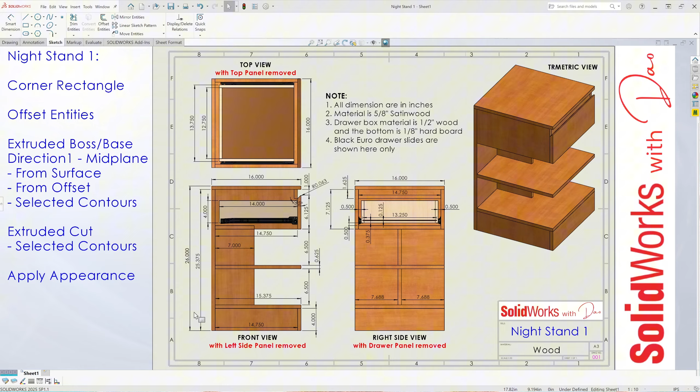Okay, looking at the front view with the left side panel removed. The overall height of the nightstand is 26 inches high, 16 inches deep, and at the right side view, 16 inches wide. Now going to the front view again. There's a back panel at 25 3/8 of an inch tall by 16 inches wide. The top panel here is 16 inches by 16 inches wide.

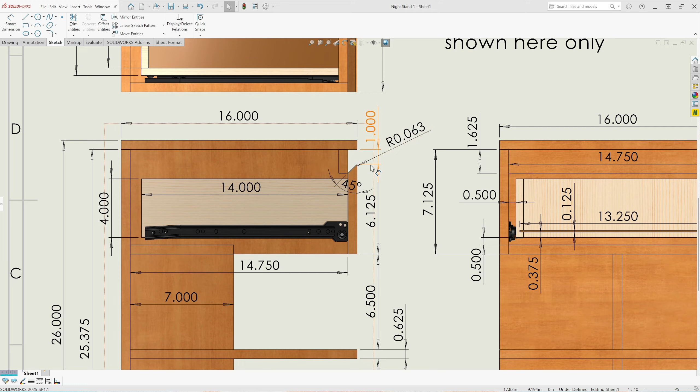Then there's this small panel here in front of the drawer front, and that's 1 5/8 of an inch tall by 14 3/4 of an inch long. The drawer front itself is 6 1/8 of an inch high by 16 inches, shown at the top view here, 16 inches wide. And at the top there's a miter of 45 degrees, and at the top tip point there's a radius of 1/16 of an inch to soften the edge, make it less sharp and pointy.

At the front view here, there's an upper panel. That's 7 inches wide by 14 3/4 of an inch long. Then there's two vertical center panels, 7 inches wide by 6.5 inches tall. They're positioned right in the center of the nightstand, shown in the right side view, right in the middle.

The middle panel here is 15 3/8 by 16 inches wide, and the bottom panel is the same. Then there's a front panel at 4 inches high by 16 inches wide. Then there's a left and a right bottom panel at 14 3/4 of an inch long by 4 inches high.

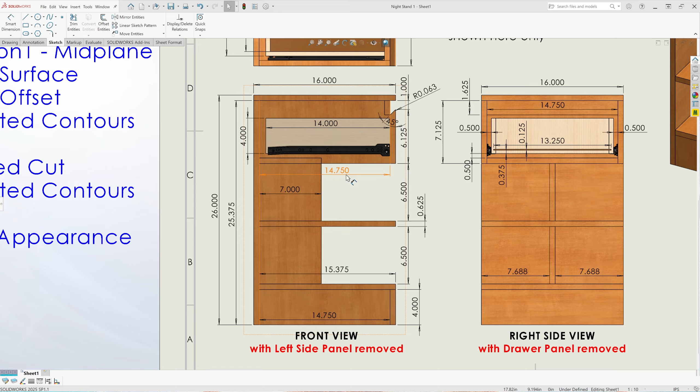Going back up where it says front view with left side panel removed, this left side panel is right here. There's one on the left and one on the right, and they are 7 1/8 of an inch tall by 14 3/4 of an inch long. It's shown here in a trimetric view. It covers the drawer box on the side.

Sticking to the front view, the length of the drawer box is 14 inches by 4 inches high, and it's 13 3/4 of an inch wide, shown at the top view with the top panel removed. And this 12 3/4 is to show the length of the back panel of the drawer box, at the back here.

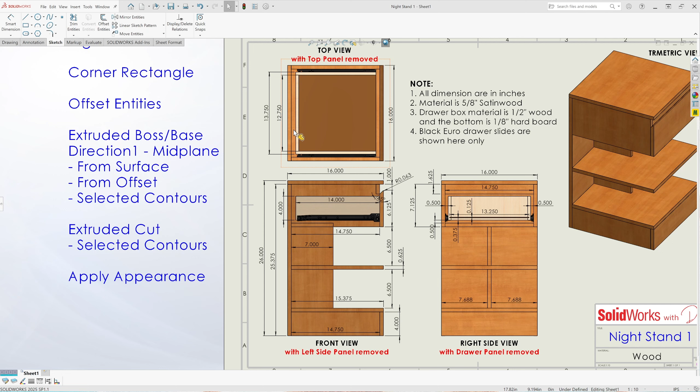Now moving to the right side view with the drawer front panel removed. Looking at the drawer box now, it's sitting inside from the left panel and inside from the right panel, 1/2 inch on both sides, and that's the spacing for the Euro slides.

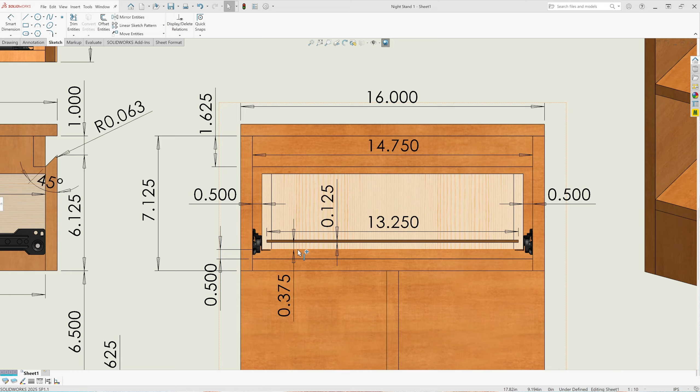The bottom of the drawer box is sitting up from the top of the upper panel 1/2 inch. And the drawer bottom is 1/8 of an inch hardboard, and it's sitting up from the bottom of the bottom panel of the drawer box, 3/8 of an inch up.

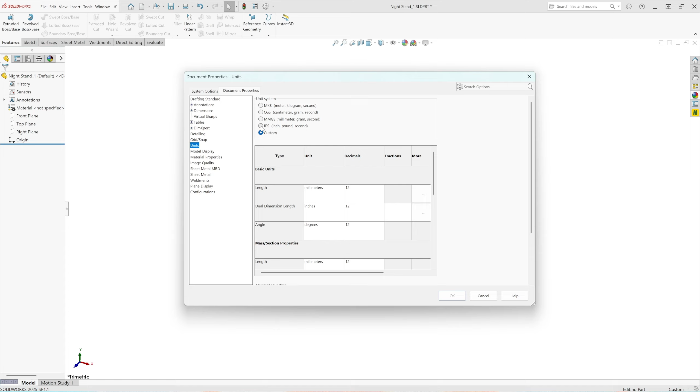So let's get started and design Nightstand 1. File, New, Part. Save drawing as Nightstand 1. Going to apply scene here, plain white. System Options at the top. Document properties tab, units, IPS drawing in inches, 3 decimal places for dimensioning.

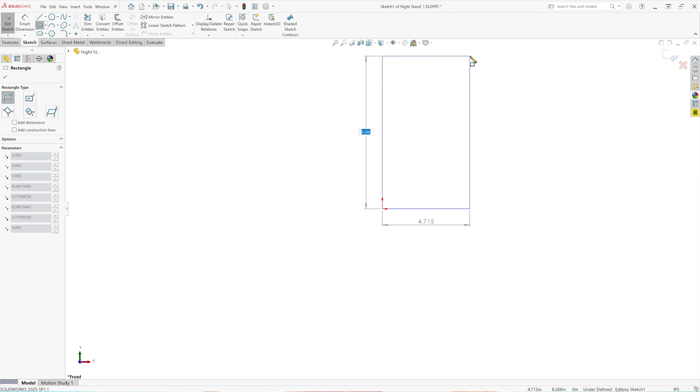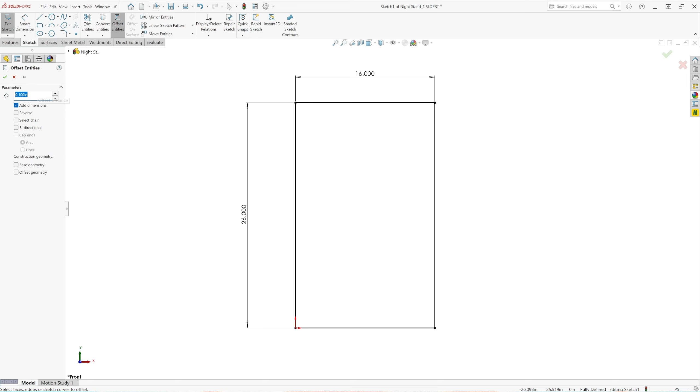Starting from the front plane. Sketch front plane, a corner rectangle from the origin at the bottom left. Smart dimension, 26 inches. 16 inches. Cancel smart dimension. We're going to do offsetting now. Offset entities, distance 4 inches, add dimensions checked. Up, or reverse direction. 4 inches.

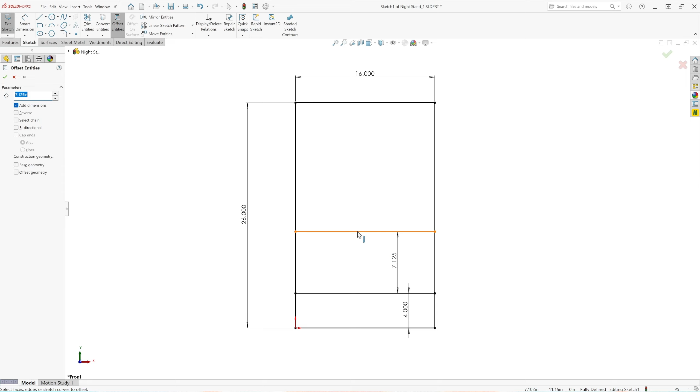Offset 7.125, 7 and 1/8 of an inch, this line up. Hit enter to repeat the command. Same thing, up. Now I'm going to offset 5/8 of an inch, so 0.625. I'm going to offset this line down.

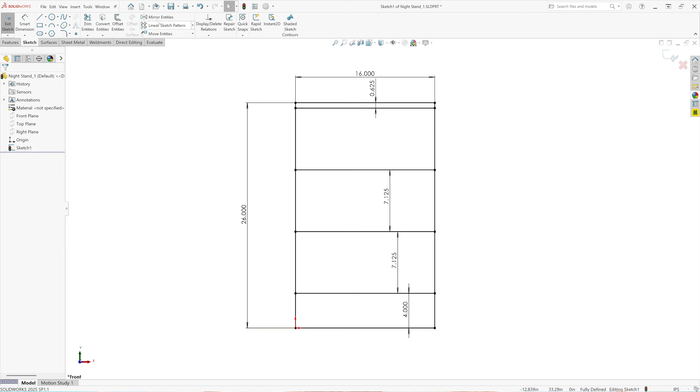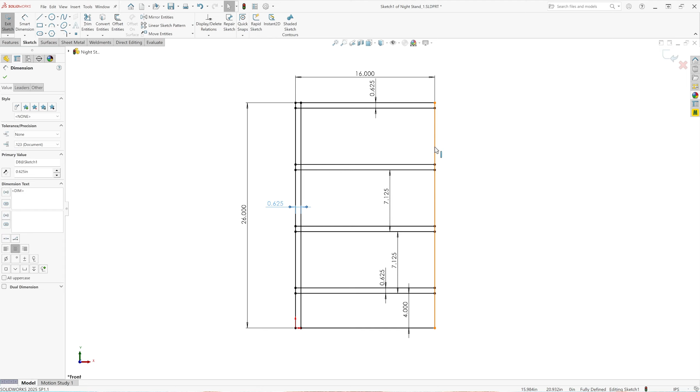Offset again. Select this bottom line, hold shift, select this line, and reverse direction up, shown with these yellow lines, 5/8 of an inch. Again, offset 5/8 of an inch, add dimension, this left line inwards, offset again, this right side line inwards. Now I'm going to offset again at 7 inches, this line, towards the right, inwards.

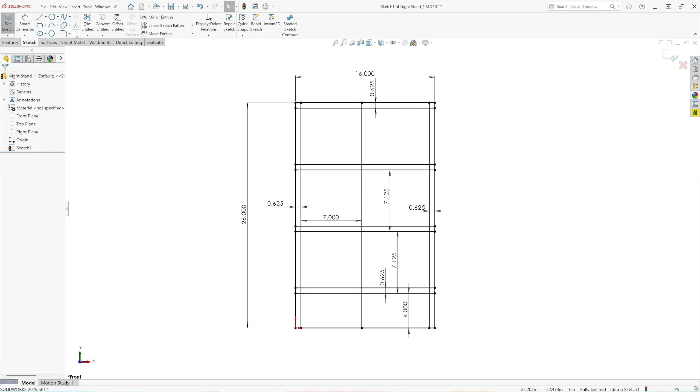Now we're going to do a lot of trimming. Trim, power trim, trim this line, this line, this line, so I have my top panel. Going to the left side here, trim this line, those two lines, this line, these two lines. Now I got my back panel. I'm going to trim this line, this line, this line. This middle line here. I don't need this. So I got my middle panel.

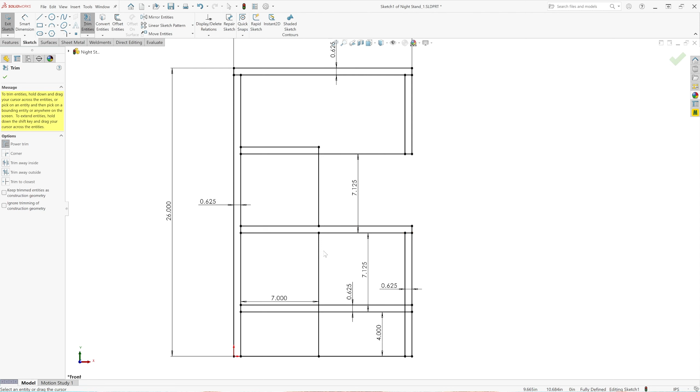All right. I don't need these two lines. I don't need this line. And I don't need this line.

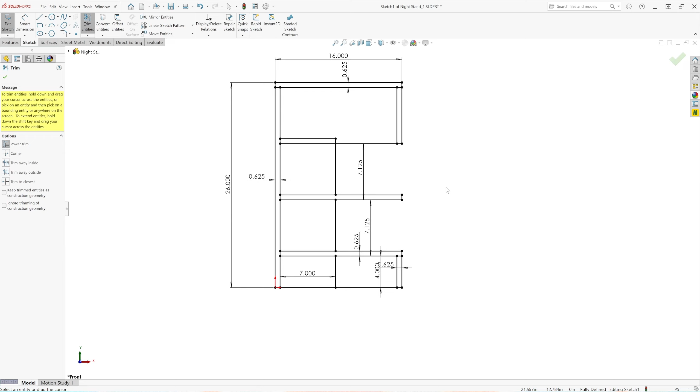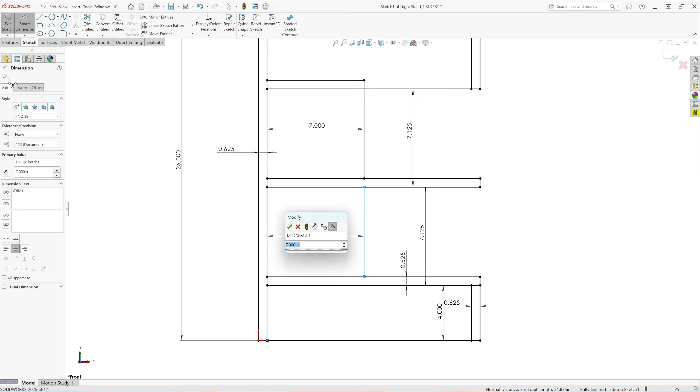And I don't need this line. Okay, so go smart dimension. That's 7 inches, put it back. Okay. And this is the same thing, 7 inches, just to make our drawing fully defined. Again. Okay.

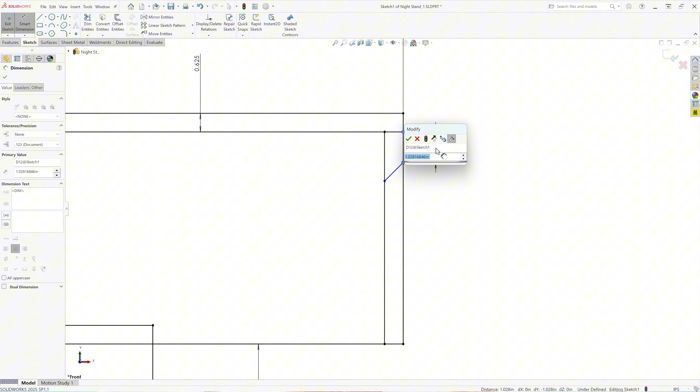Looks good. Now I'm going to cancel smart dimension, draw a diagonal line from this inside line towards the outer line. Okay. I'm going to give it a smart dimension from that point right there to that point, 1 inch. Okay. And angular dimension from that diagonal line to that vertical line, 45 degrees. Okay.

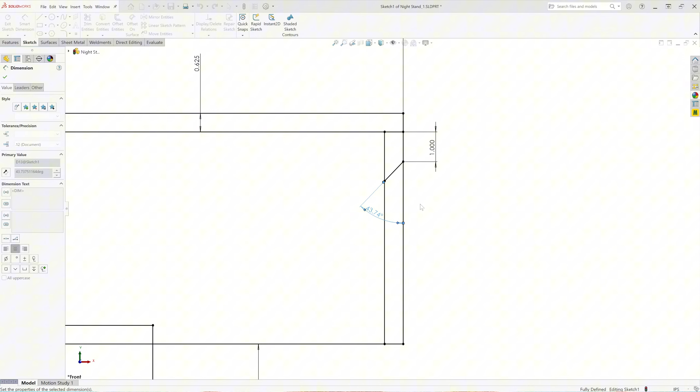Okay, so I'm gonna trim this line now. Okay, so I got my drawer front right here of the drawer box, and I'm gonna add a fillet, 0.0625, 1/16 of an inch. Okay, right there, that point, to make it less pointy. That's where the fingers go to pull out the drawer front box. Okay.

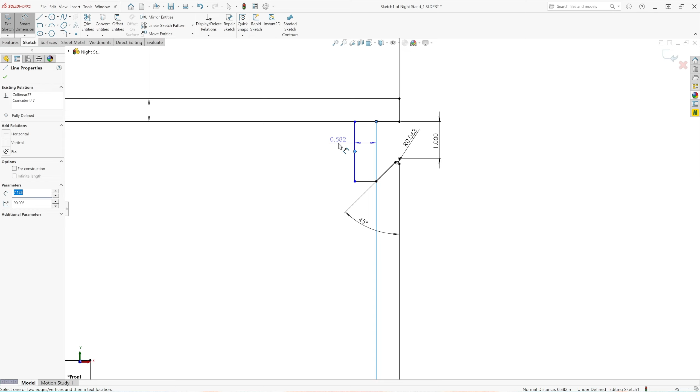All right. I'm going to draw a line like this, over and up. Okay. 2 lines. Smart dimension. The thickness of this is 5/8, 0.625. Okay, cancel smart dimension. Now we're going to be doing extruding. Okay.

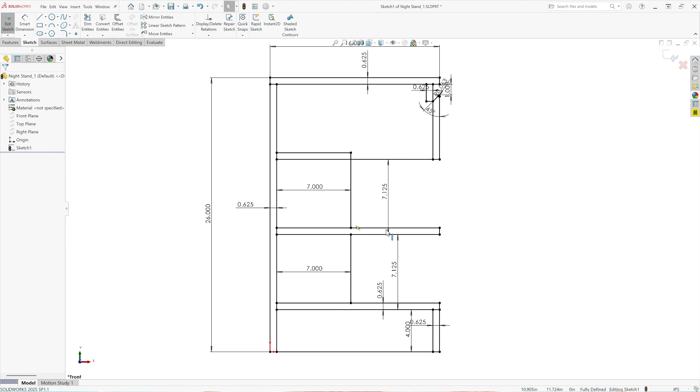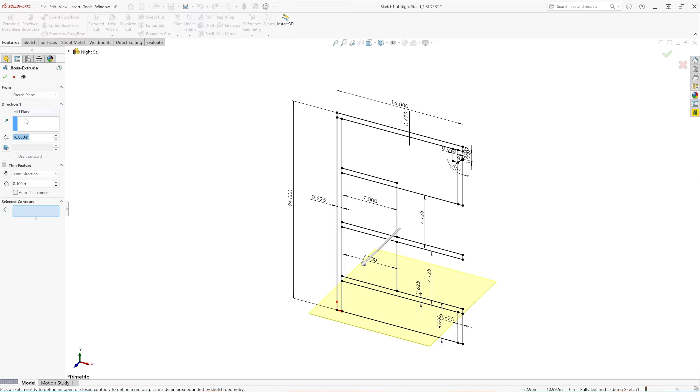All right. So I'm going to go to features, extruded boss base. Okay. The width of the nightstand is 16 inches. Okay. Selected contours, direction 1. I want it from the midplane. Midplane, 16 inches. So I'm going to look at it from the front view to choose these contours. It's easier, okay? So I'm going to select the top panel, the middle one, and the bottom one, right? And I don't want thin features, so unselect thin features, 16 inches, okay.

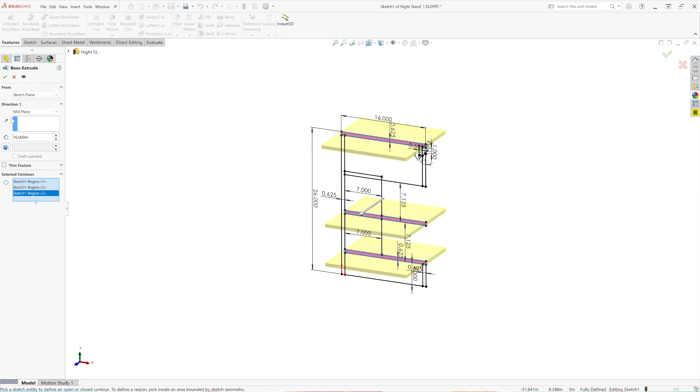So I got 3 bodies. I don't want real view graphics right now. Okay, go back to Boss Extrude 1 here on the left, the arrow, sketch 1. Continue to extrude boss base. Unselect merge result, 16 inches. Okay, from the midplane, direction 1 from the midplane, and again I'm going to the front view. I'm going to select the back panel, the drawer front, and the bottom front panel. Okay, and unselect thin features. We want them as solid bodies. Okay, from the midplane, 16 inches. Okay, so I got 6 solid bodies.

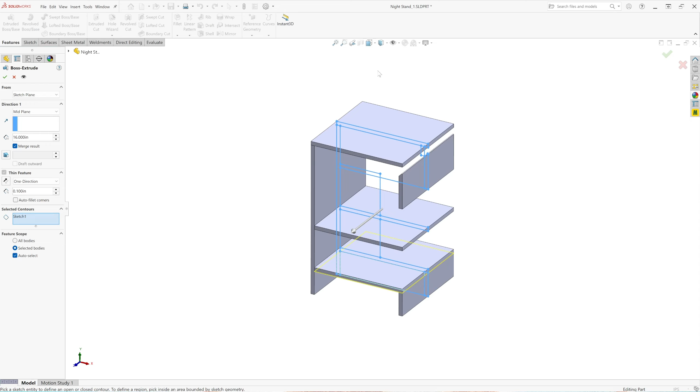Again, sketch 1, extruded boss base, view orientation right here. I like to work from the front plane. It's easier to select the contours. So I'm going to unselect merge result. Now I'm going to change 16 inches to 14.750, 14 3/4 of an inch. Okay, and from the midplane. Okay, and I'm going to select this contour, this rectangle, and this one. Okay, and unselect thin features. Okay.

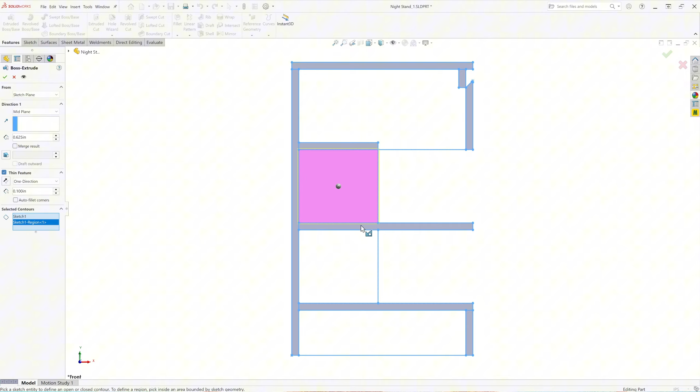Okay, so 8 panels. Now we got sketch 1 again, select it, extruded boss base. Okay, unselect merge result. I'm going to change the distance to 0.625, the thickness of the wood. Okay, 5/8 of an inch from the midplane. And again, view orientation, front plane, I'm going to select this panel and this one, the shelf support, okay? The middle panels, okay? Unselect thin features, from the midplane, okay? 5/8, all right. Okay, so we got 10 bodies.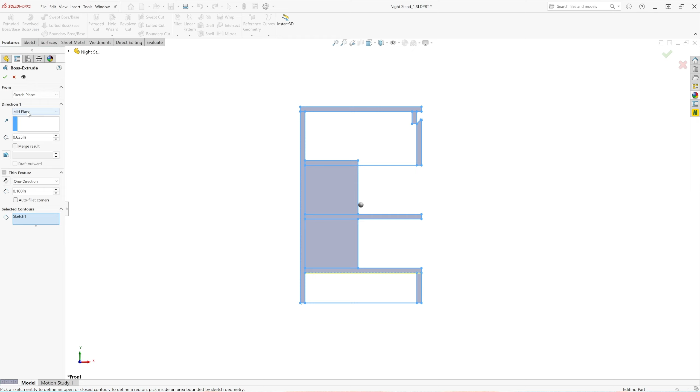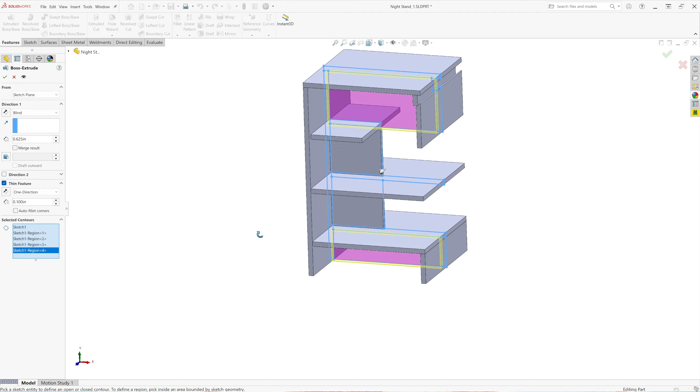So I'm going to go back to sketch 1 again and continue to extrude boss base from the front plane to look at it easier to choose the contours. Unselect merge result, keep the distance at 5/8 for the panel. We're not going to be doing midplane anymore. We're going to go to blind, okay? And I'm going to select this contour. I'm going to zoom in here, okay? Select this one. Select this one. 3 of them, okay? And this one, okay? I'm going to tilt it. Okay, so it's from the sketch plane.

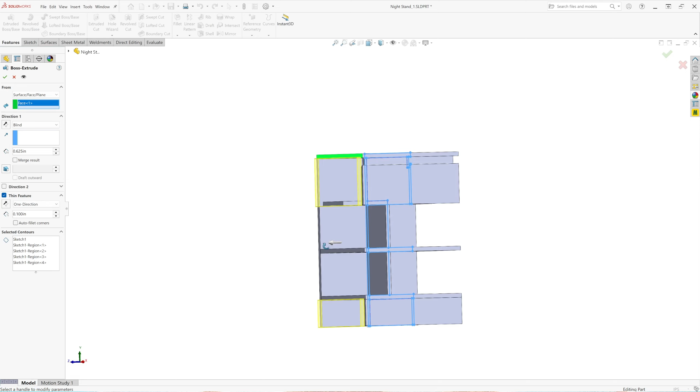We want it from the blind now, but we want it from the surface. So I'm going to go from surface. I'm going to choose this one or this one. I'll choose the top one, okay? It's highlighted in green. And as you can see, it's extruding out, okay? Towards the left, the arrow. So we're going to reverse it, direction 1, reverse it back in. Okay, and that looks proper. So we're going to go okay. Oh, thin features is checked, uncheck it. Okay, so now we got 12 bodies.

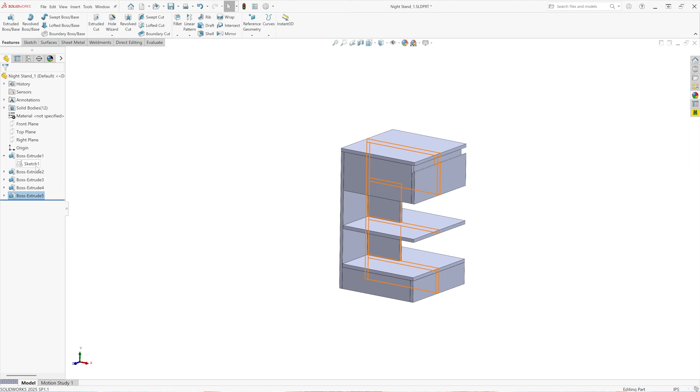And then again, from sketch 1, we're going to do the other side, okay, the right side. We got the left side panels, now we want the right side. So sketch 1, extruded boss base, and unselect merge result, 5/8 from blind. Selected contours, same thing, I'm just going to the front plane to select that profile or contours. This one, this one, this one, and this one, okay?

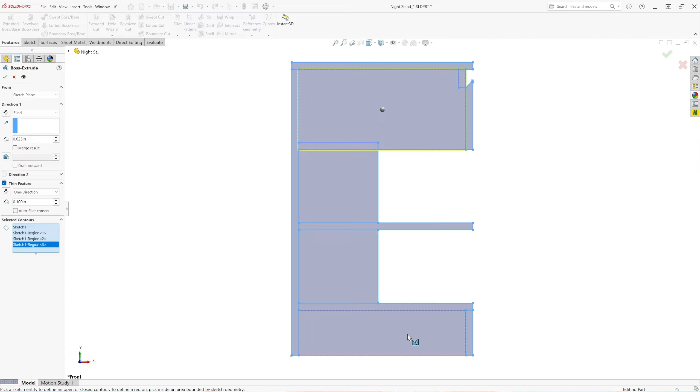All right, so 4 contours. And from surface. And not the left side now, we want either one of these surfaces. So I'm going to select that surface, highlighted in green. And this time the arrow is pointing towards the inside of the cabinet, okay, or the nightstand, and it's correct. So I'm going to leave it. The direction is inside, not outside, okay. Thin feature selected, unselect that.

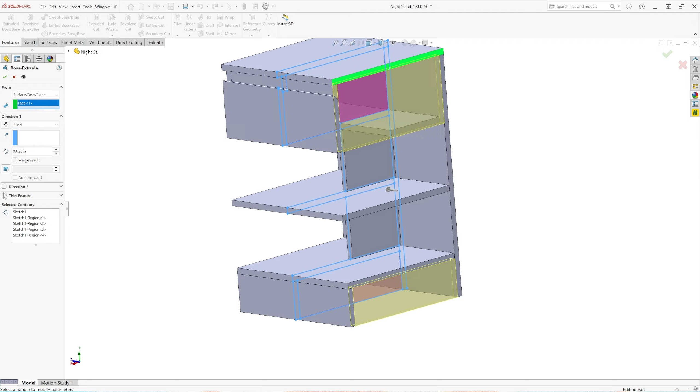Okay. All right. So looking at it from the top view to make sure everything is good. All right. Right side view. Okay. Front view. All right. And then trimetric view.

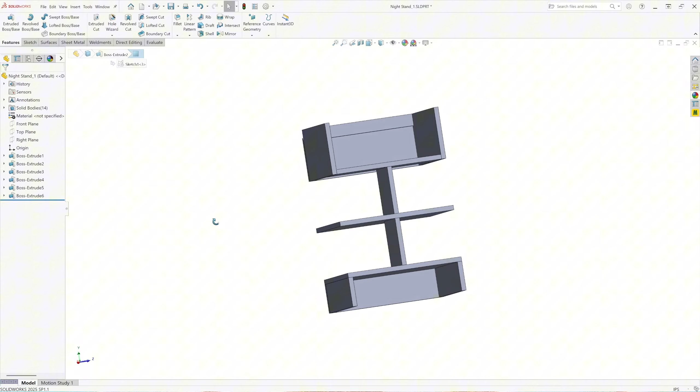Okay. So now we're going to draw in or sketch in the drawer box. So for me, I'm going to make it a little easier for me. I'm going to hide the top panel, hide the back panel for now. Get out of the way. I'm going to work on this face right here. I'm going to sketch on this face. So select the inside face of the drawer front. Okay, looking at it from the back side. Okay, and sketch.

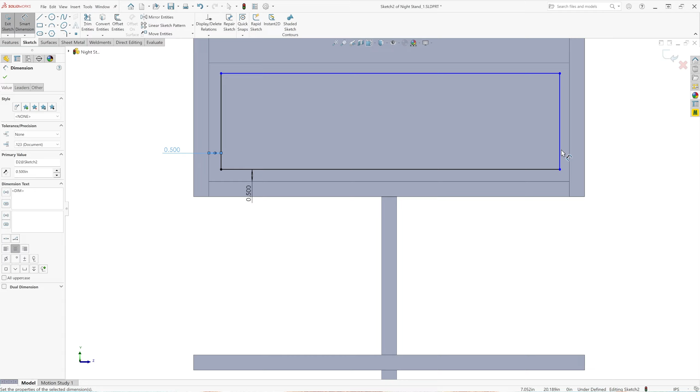Okay, I'm going to set corner rectangle here at the top left. Okay, something like that. Okay, smart dimension. That edge to that line, 1/2 inch. Okay, and from that line to that edge inside of the side panel, okay, 1/2 inch. Okay, on the right side here, this line to that inside edge of the right panel, 1/2 inch.

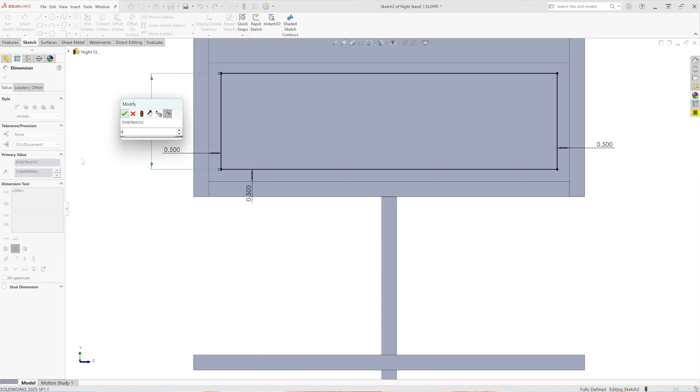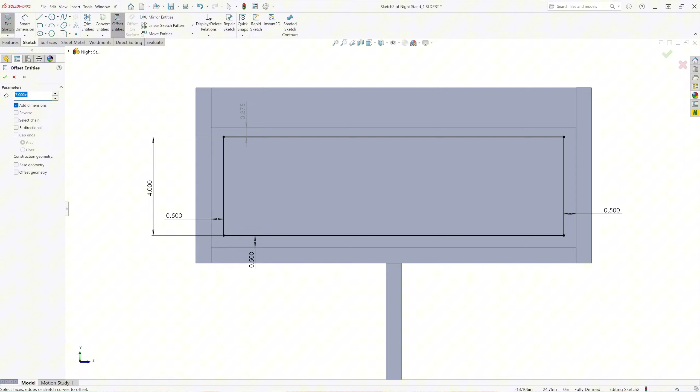Okay, the height of the drawer box is 4 inches. Okay. And just to verify, from the top of the drawer box to that edge right there is 3/8, and it is. Okay. All right. So now I'm going to cancel smart dimension. I'm going to draw in the offset. Okay, I'm going to offset 0.5 inch, 1/2 inch, add dimensions. Okay, for the drawer sides, that's 1. And then again, offset, add dimension towards inside.

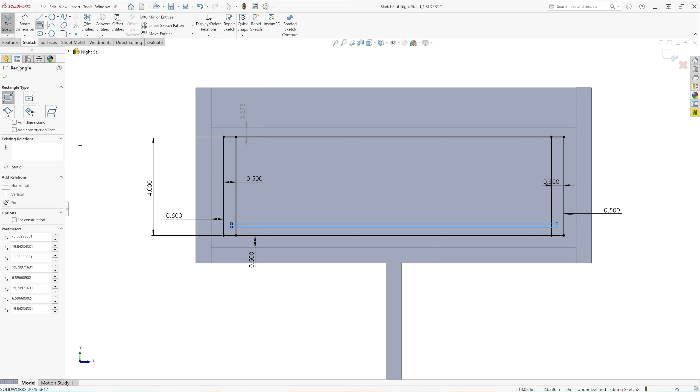Okay, now I'm going to draw the drawer bottom, corner rectangle, something like that, top left to bottom right. Okay, cancel rectangle, smart dimension. From that edge to the bottom of the drawer box is 0.375, 3/8 of an inch. Okay, and it's sitting inside of the left and right panel by 1/4 of an inch, so that's half the thickness of the wood. So it's 0.25.

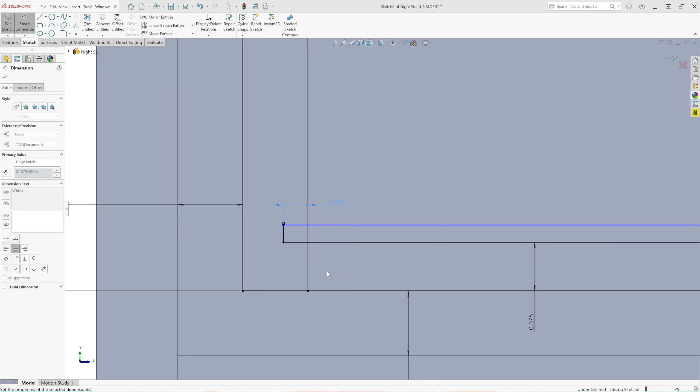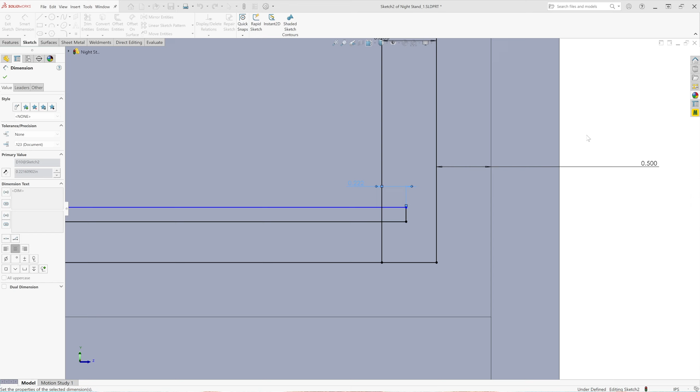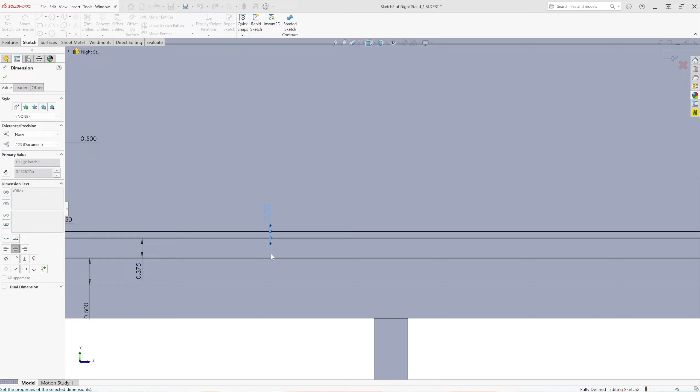Okay, and likewise on the right side, 1/4 of an inch, 0.250. Okay, and the thickness of the bottom of the drawer box is 1/8 of an inch, 0.125. Okay. Okay, cancel smart dimension, and we're going to be doing some extruding again. So, okay,

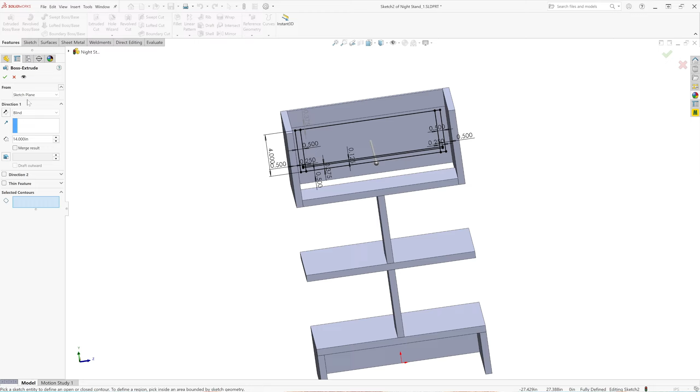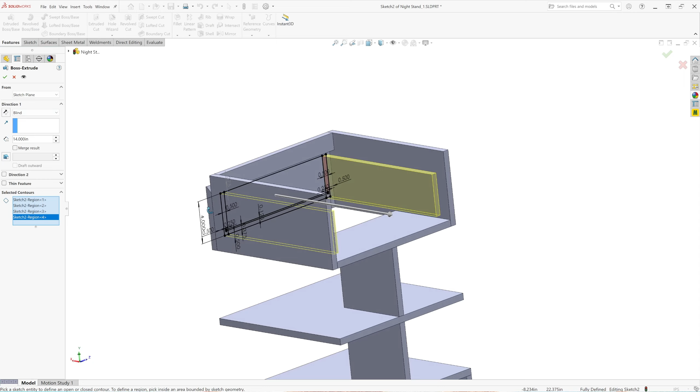features, extruded boss base. I'm going to get the left and right sides of the drawer box, so I'm going to unselect merge result. The distance is 14 inches. Put 14 in there. From sketch plane, all right, direction is blind. Selected contours, I'm going to zoom in here. Select that with that little rectangle right there. Okay. 1, 2. So 4 contours. Okay, 14 inches towards the back. That looks correct. Okay. Unselect merge result, it is 16 bodies.

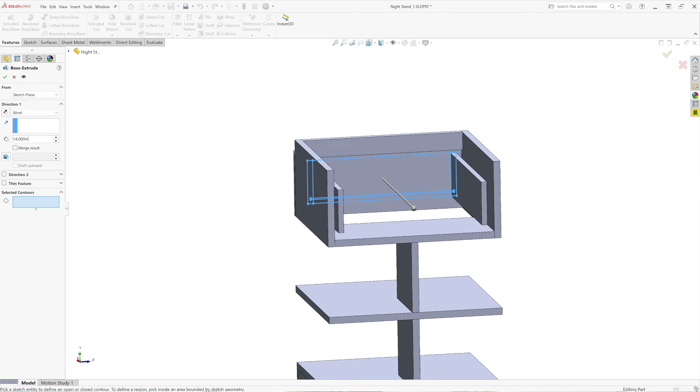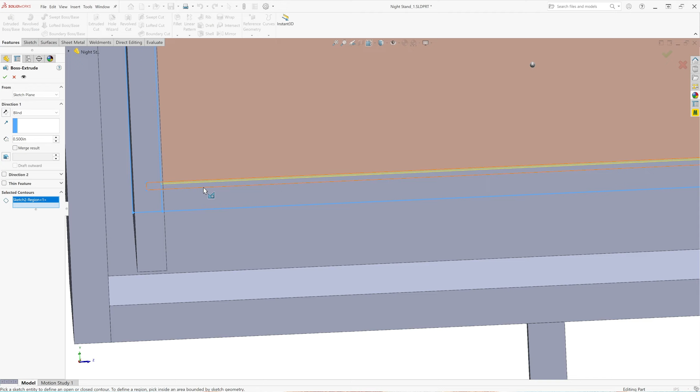Okay. So now going back to boss extrude 7, sketch 2, extruded boss base. We want the back panel of the drawer box. Okay. So unselect merge result. The thickness is 1/2 inch, not 14. All right. Blind, direction is blind, that's okay. Okay, so I'm going to select the contour now. I'm going to select this rectangle, the one underneath it, okay? Not this contour, okay? That rectangle. And then the bottom rectangle, so 3 in the center. 1, 2, 3, okay? And then from surface.

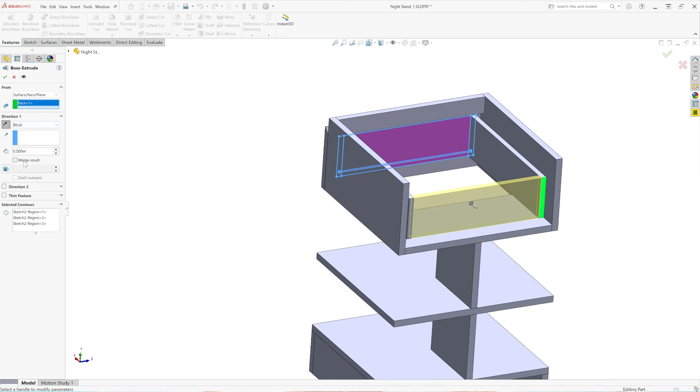Okay, rotate this a bit, from that surface. The back edge of the side panel of the drawer box. Okay? And looking at it from the top view, it's going outwards. We want it inwards, right? So we want to reverse the direction inwards, okay? So it's correct now. Okay? And I'm going to make sure, okay, merge results unselected. Okay. So we got 17 panels, okay?

Okay. So again, I'm going to sketch 2 again, right, from boss extrude 7. And instead of going extruded boss base, I'm going to extruded cut. To do a cutout for the bottom panel of the drawer box to sit in. Okay, so the distance is 14 inches.

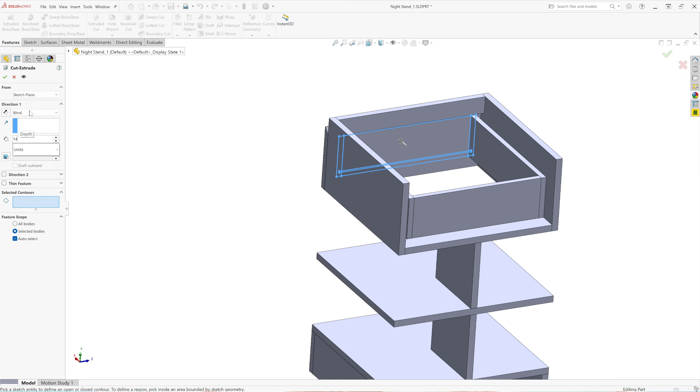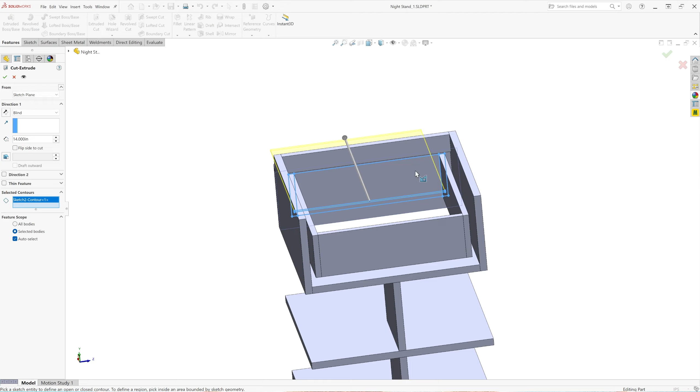Okay, blind. Selected contour. Okay, I'm going to try to zoom in here. All right, I'm going to select the contour of that bottom panel. Okay, it's highlighted in pinkish orange. We're going to put the pointer on the edge here, or the outline, and then select the contour. All right, now it's obviously going the wrong direction, so I'm going to go direction 1, blind, reverse the arrow, and I'm going to show you on top view how it's going to cut.

So it's cutting from the sketch plane right here of the inside face of the drawer front all 14 inches towards the back of the drawer box. So that's not correct. So instead of sketch plane, we're going to offset 1/4 inch. We want it to sit 1/4 inch inside the material of the drawer box and the drawer front, by 1/4 inch all around.

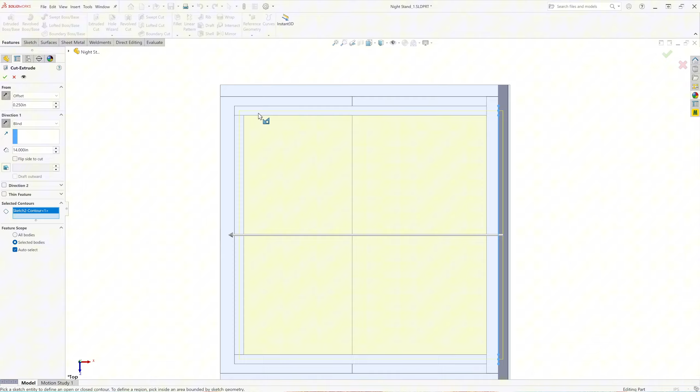So now 1/4 inch is correct, but it's offsetting the wrong direction. You can see it's cutting way too outside of the drawer box, as indicated here. So we want to reverse this in towards the drawer front, 1/4 inch. So reverse it. Now it's inside of the drawer front 1/4 inch, and it's inside the drawer box back panel 1/4 inch. We know the left and right is 1/4 inch in towards the left and right side panels of the drawer box. So everything looks good here for the extruded cut.

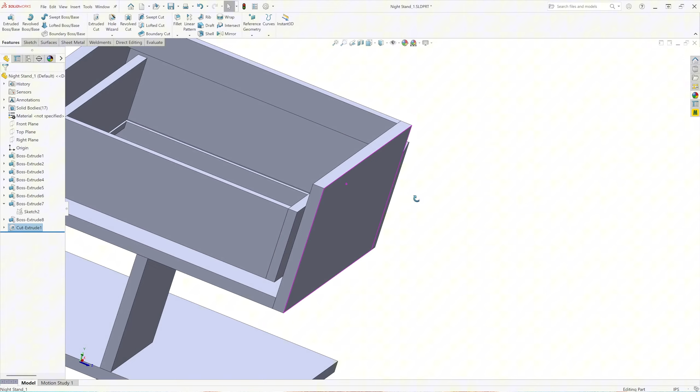And I'm going to go okay. And I'm going to show you. Zoom in here. So like that. The front, and the other side. Okay. So now all there's left to do is add the bottom panel. So we're going to go again to boss extrude 7 and use that same contour to extrude the bottom panel. So sketch 2, select it, extruded boss base, unselect merge result, 14 inches, okay.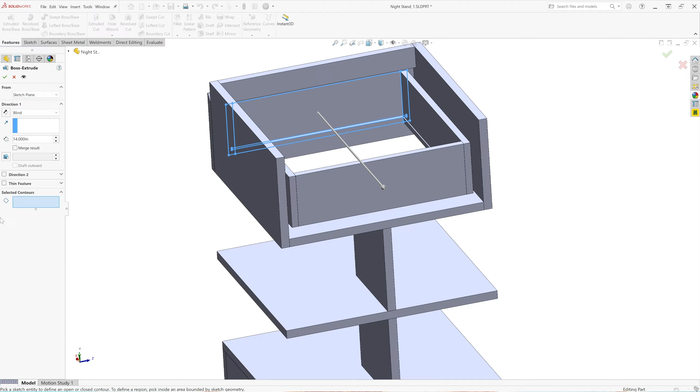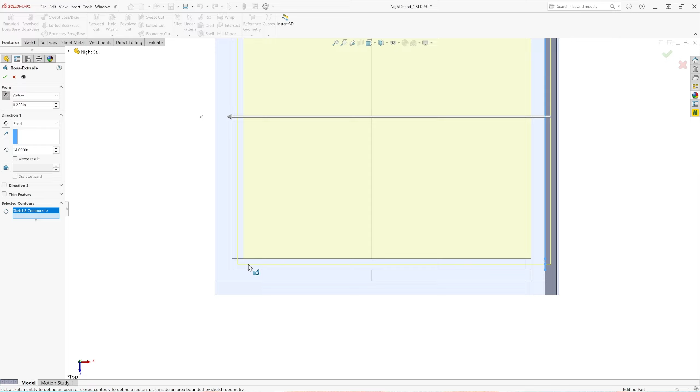All right, blind is correct. And selected contours, I'm going to use my pointer to select the contour again, right there. It's going the right direction, but looking at it from the top view, again, it's from the wrong plane. So we're going to go from offset, 1/4 of an inch, like we did with the extruded cut. It's protruding outside of the back of the drawer box, so we want it to offset towards the front, 1/4 of an inch. So now it's sitting proper, all around, 1/4 of an inch.

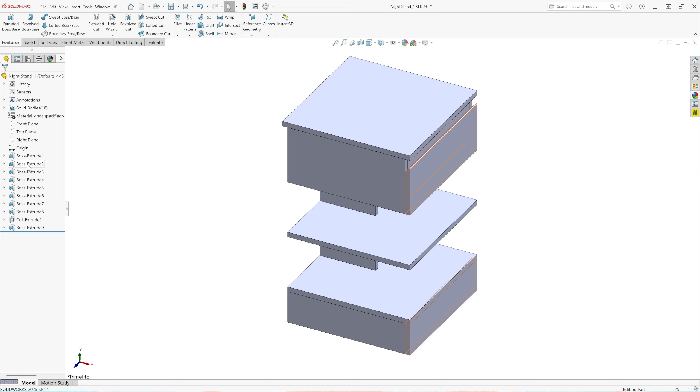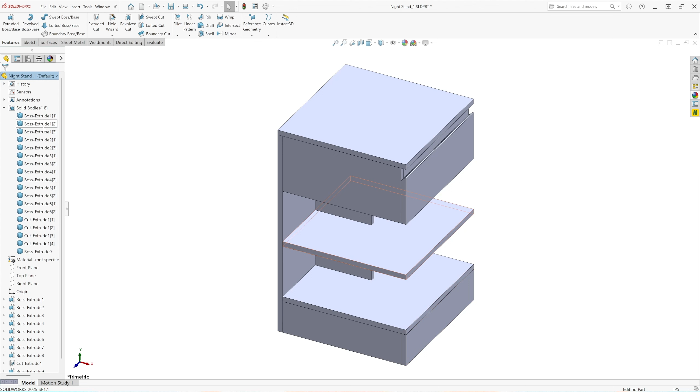Okay, so now we have 18 solid bodies, and that's the total that we want. So now I'm going to go to Boss Extrude 1, the eyeball, show. Put back the top panel, Boss Extrude 2, show. Now we got the back panel back in place. Now I'm going to go here, Solid Bodies 18, into that folder. I'm going to select, hold shift, go all the way to cut extrude 1/1. I'm going to hide that for now.

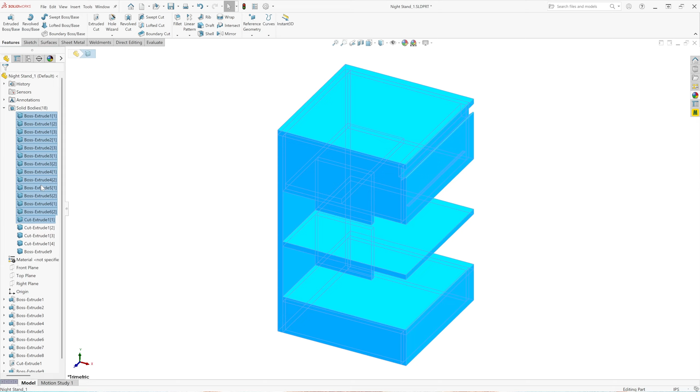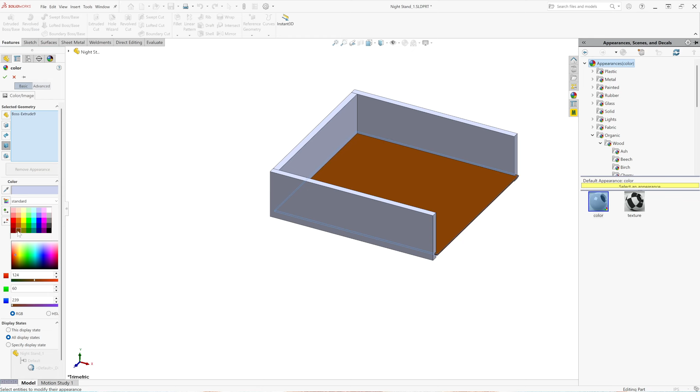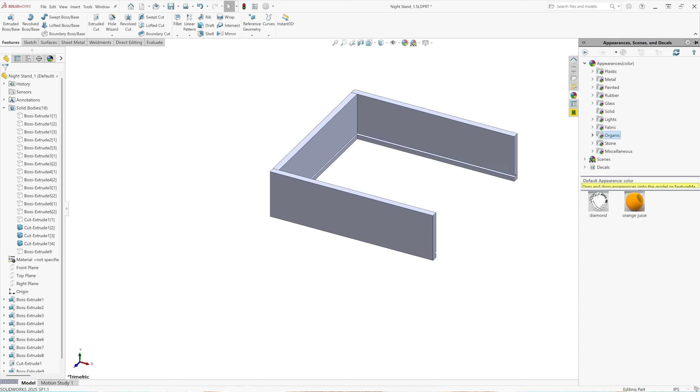Okay, so I can just apply some appearance to this. I'm going to select this Boss Extrude 9 first, apply appearance, and choose just brown for the hardboard, to have some contrast between that and the drawer box material. Now I'm going to hide that one, and then I want to work on these three. Go there, appearance, organic, wood folder, the general one. I'm just going to go polished pine, double click that. So just a random appearance here for the drawer box.

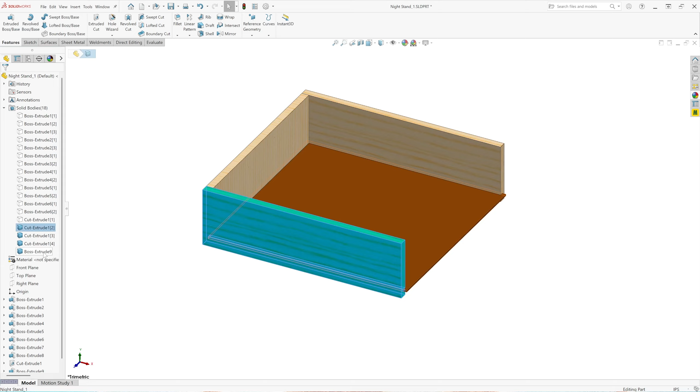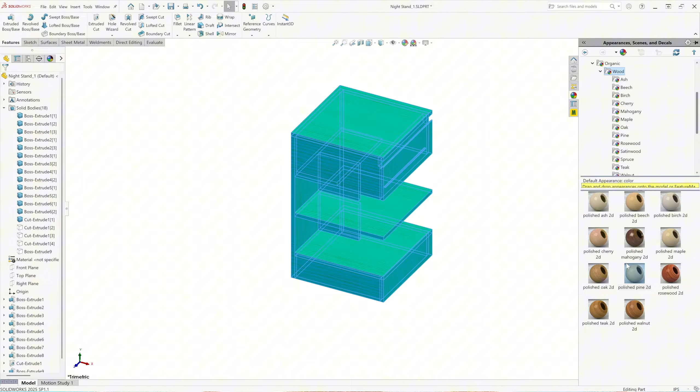All right, so I'm going to turn back on the drawer bottom. Now I'm going to go cut extrude 1, 2, hold shift, and hide those 4 that I've already applied appearance to, and turn on Boss Extrude 1 to cut extrude 1/1. Okay. So now I'm going to select all that and go to wood and Satinwood. Double click on that. And I'm going to turn on View Graphics. And go back and turn on those other 4 right here, cut extrude 1, 2 to Boss Extrude 9. Turn it on.

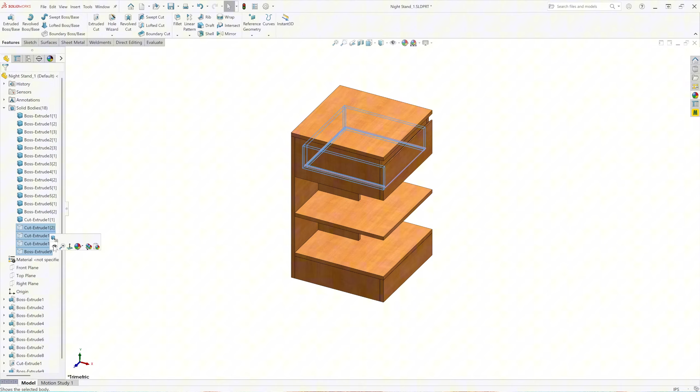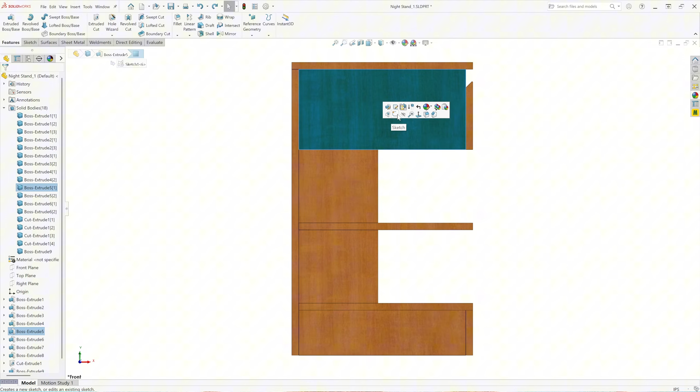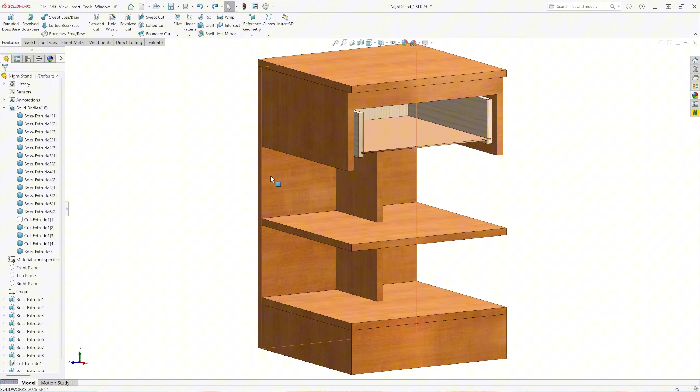Okay. I'll look at it from the top view. I'm going to hide the top panel. Undo. Go to the front view. Hide the left panel, so we can see the details. Undo. Right side view. Hide the drawer front panel. And like mentioned earlier, the bottom is protruding 1/4 of an inch into the drawer front and into the sides of the drawer box. You can see that with the cutout.

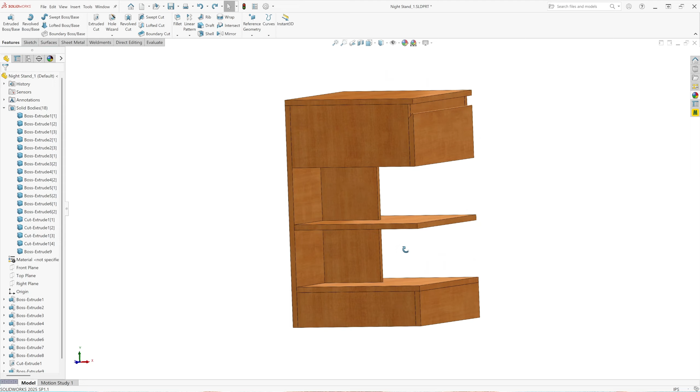Okay, I'm gonna undo that. Trimetric view. Just to take a look underneath. Around. Back to trimetric view. Okay, there you have it. We've designed Nightstand 1. I hope you like it.